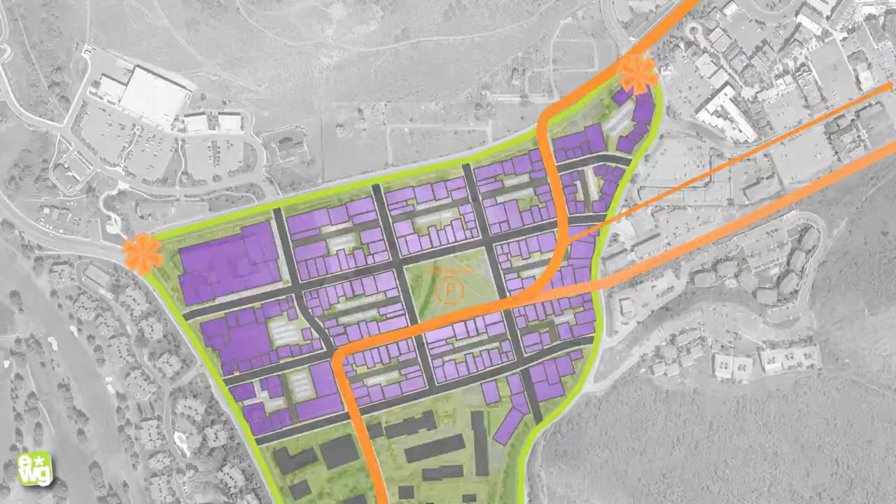The planning staff at the city has been working on this process for a long time too. Not too long ago they developed a plan. It's a study, not an implementation — it's what can we do, what's possible in the Bonanza Park District. And they came up with a concept that was sort of form-based code: traditional street grids, similar in scale to what we have in Old Town, something that's walkable, something you can use, where there's multiple activities going on that creates a lively place.

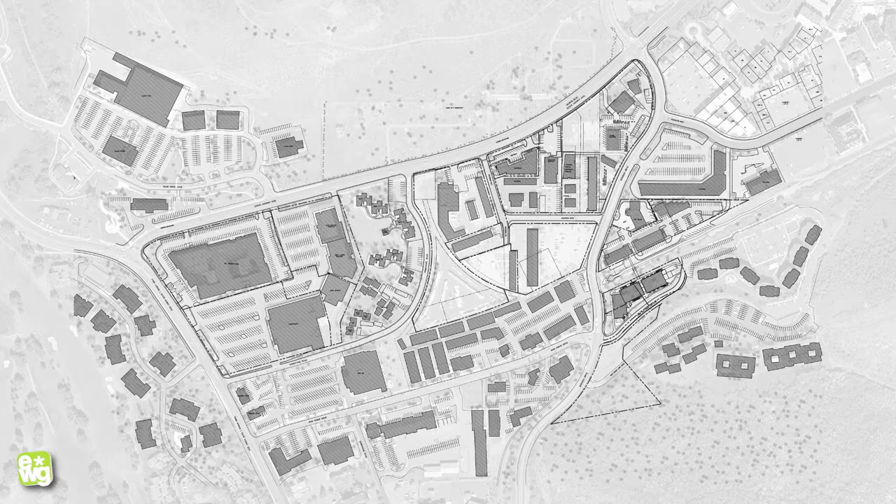Well, as a developer and an architect, we had to go back and look at how can we implement that idea, what are the opportunities here. So we went back and said, here's the existing conditions, here's what's there, here's the property lines, here's the buildings that are there. How can we implement the idea the planning staff has put together and turn it into something that's possible?

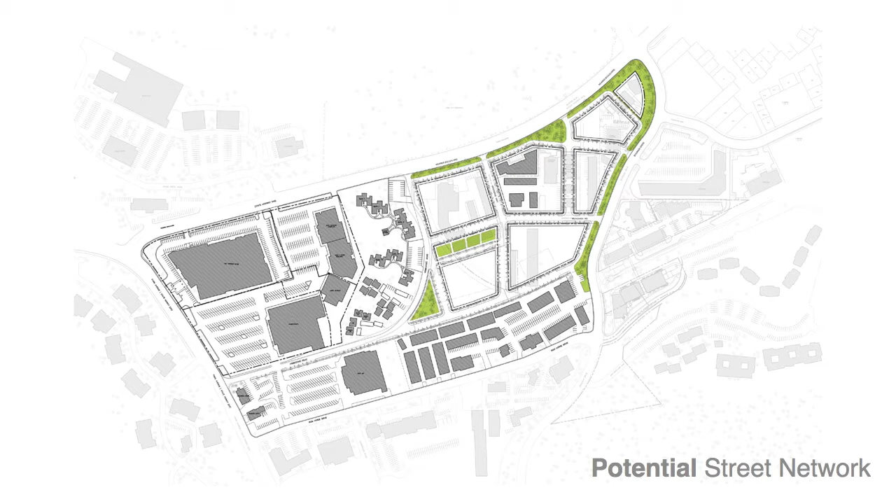So we developed a potential street network. We used that basic idea, tried to work with most of the property lines. We got some help we're going to need with Rocky Mountain Power, the city. But this is one idea of how we can develop it.

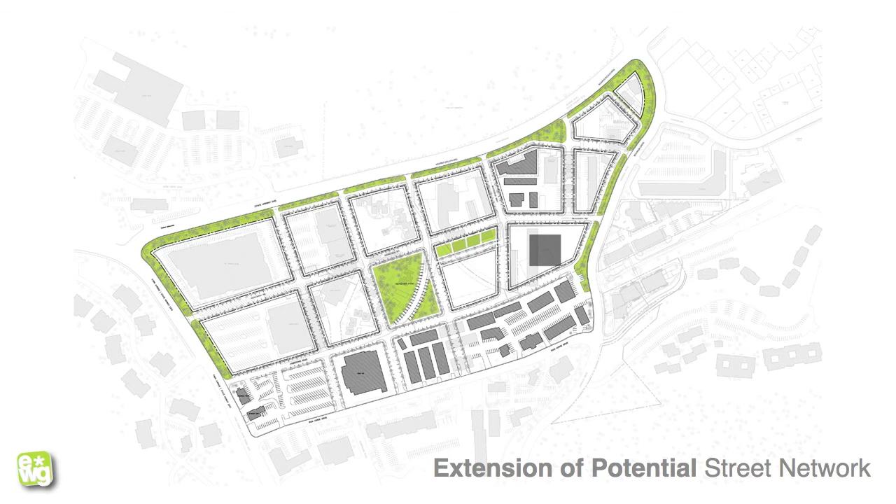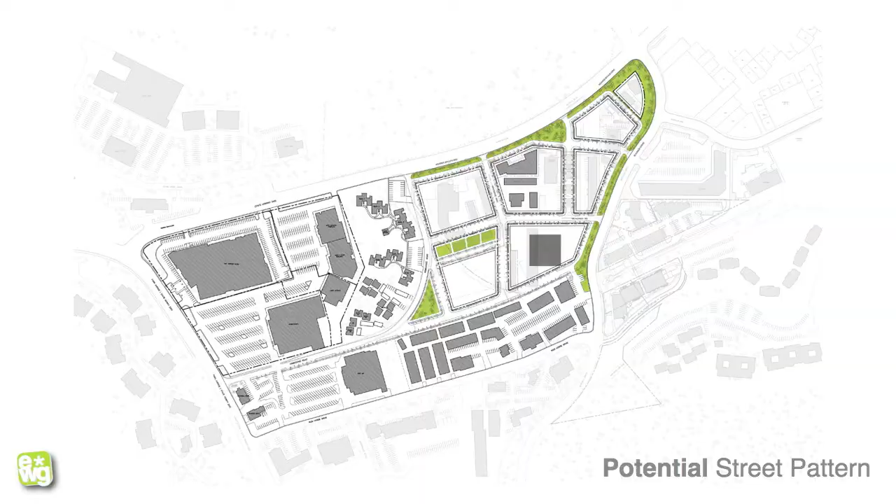Start to see central core spaces — these are the areas that we're working on. How could you extend it? That's a possibility, similar to the ideas developed in the document by the planning staff. But we're really talking about the street pattern and the areas that we've got this existing MPD — it's where we can make a difference as a developer and an architect.

So if you understand what's going on, you want to understand how do you solve the problems that are there — what are the real problems? Well, today we have these roads that go around the perimeter. They really are arterial roads, and arterial roads move people to and from different places.

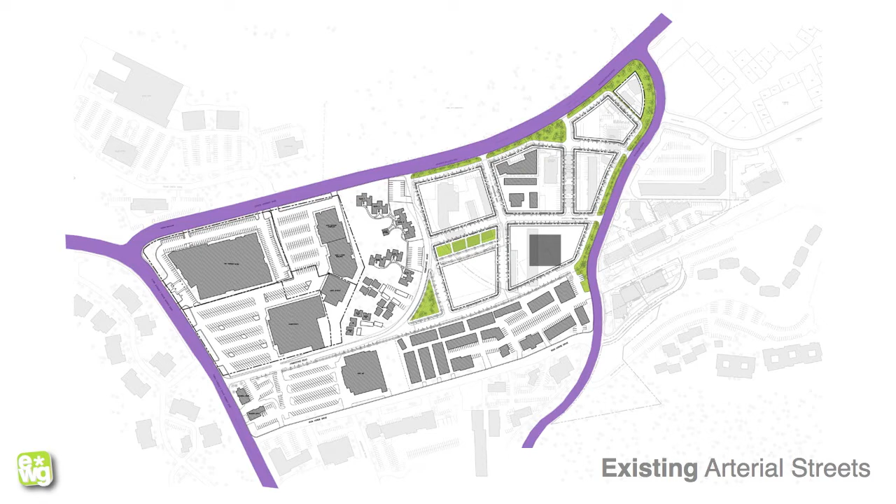They're interesting, but they failed somewhat because the arterials are also trying to function as a commercial street. So they're working for two things, and if you try to do two things, you're probably not doing either one very well. So we've looked at what can we do to solve that problem. We've looked at developing a potential mountain boulevard, reducing those turn-ins, the turning actions, the curb cuts, all the different things that cause traffic patterns and log jams in town.

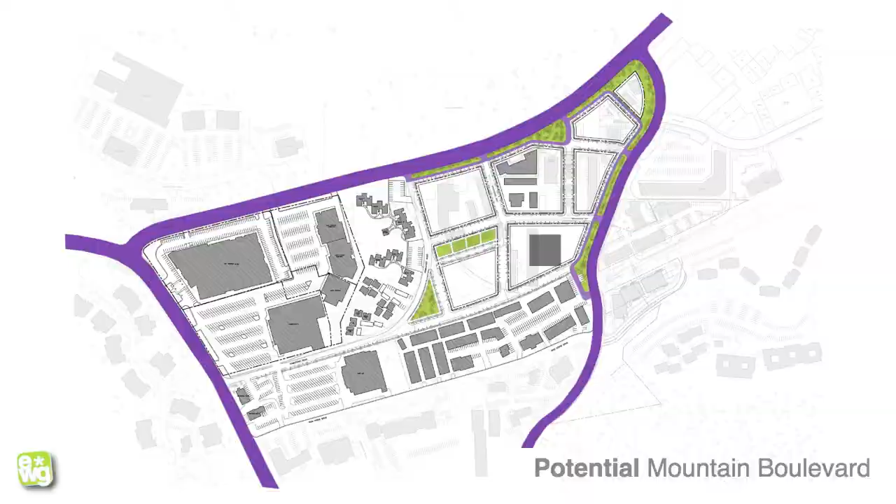And if you look at that in this situation, those little purple lines you see here become access points to the properties there. What's a potential mountain boulevard look like? This might be a section of it. And why is this important?

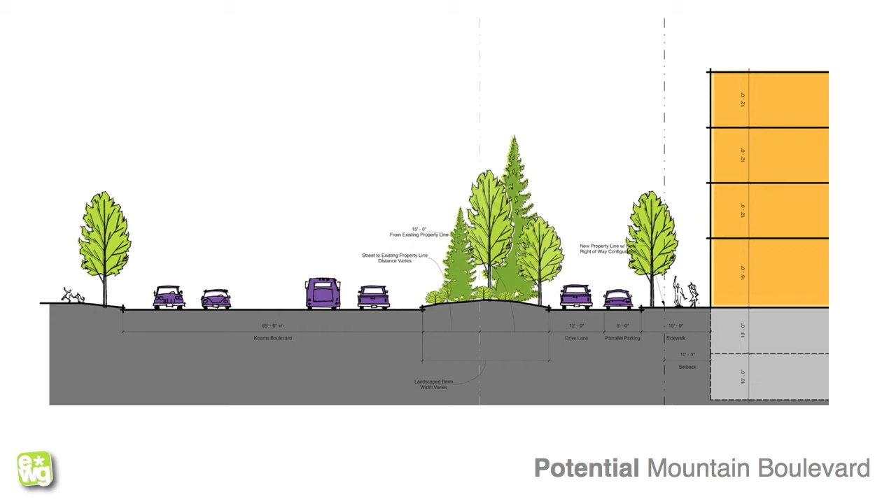And then we developed this landscape buffer, a relatively large space where we can plant mountain-type plants. It creates a place to store snow — one of the things that's really important, I think, here in this climate anyway, is a place to make it work. Then we have our access, and then sidewalk or areas before you hit a building structure.

We already have an idea in town that's very similar to that. This planting area that we've talked about, the one I've shown, goes from here to about the creek bed, and the buildings start back here at about the road. So you get an idea of what the aesthetic of that might be, the opportunities that we have, and what it might be like.

Once you start looking inside, you're saying, well, if the arterials are your commercial streets, where are they? Well, they're in the core. We're trying to create something interesting and lively. And if you put those in the core, the orange lines here represent what our primary commercial streets are.

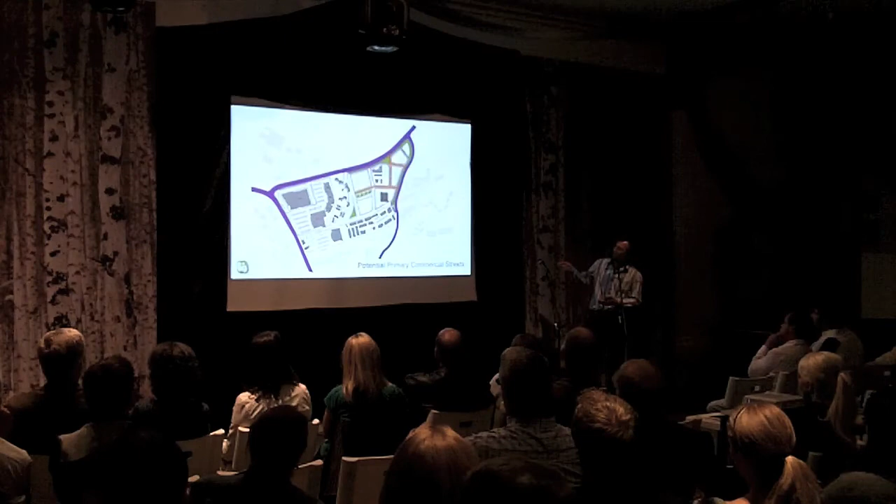We've drawn a section through this piece right here, and we've called that out as sort of a market street. What's a market street? Well, you see these all over Europe, on the East Coast, in other older towns and cities where there's a central core. They're an activity where there's both transportation happening and activities and places for community and people to interact.

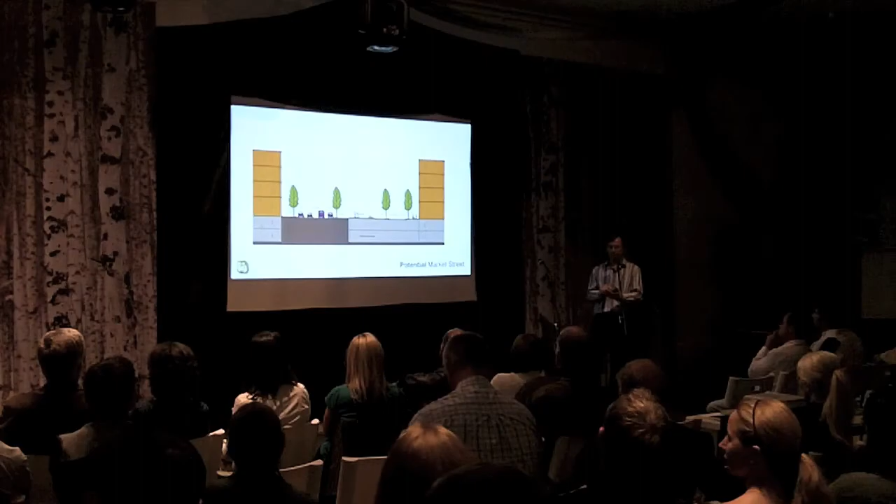What's it look like? It might look something like that. Maybe there's more sidewalks here. Maybe there's mass transit in the center of this. There's an opportunity to create something really unique. But this is about the same scale and size of what we've shown.

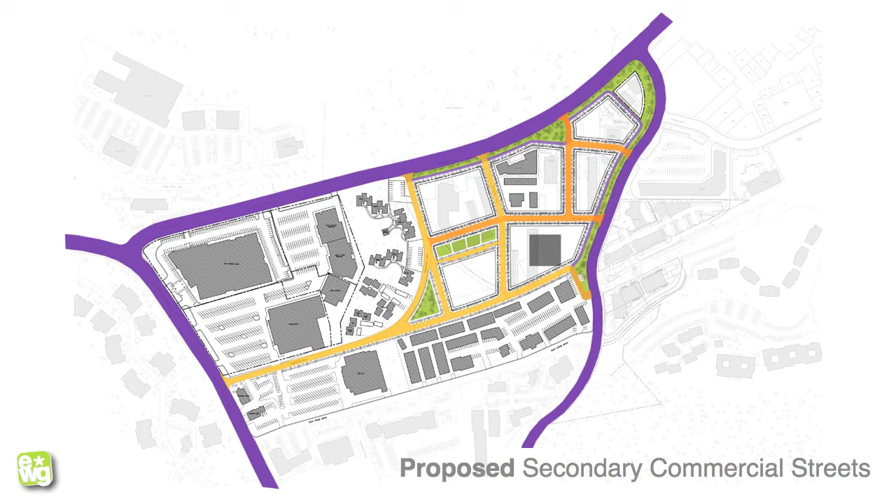And then you get into secondary commercial streets, and what do those look like? Those are the lighter orange that we've shown here. So you start to develop more than just one street. You start developing activities where people can find places and get together and do different things. A section of that might look like this.

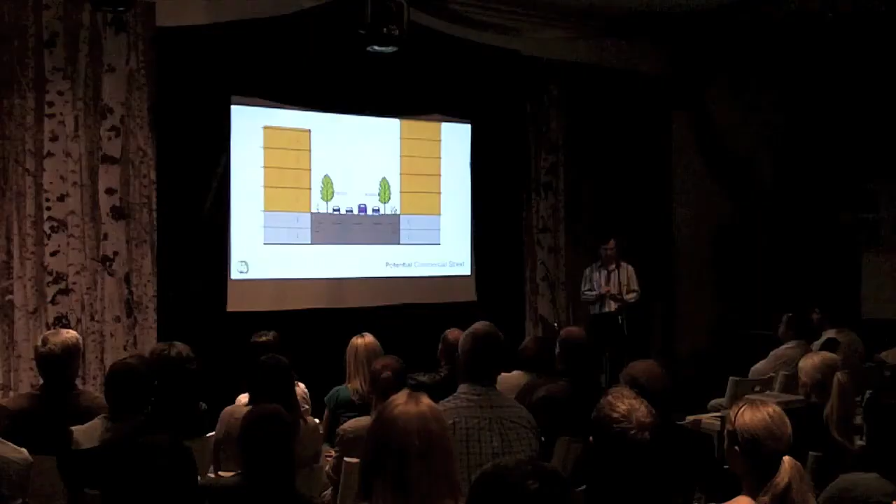Well, this is pretty close to the same dimension that we have on Main Street. Looks about like that. If you want to look at those heights, you want to look at those spaces, they're very, very similar to what's on the lower part of the old part of Main Street.

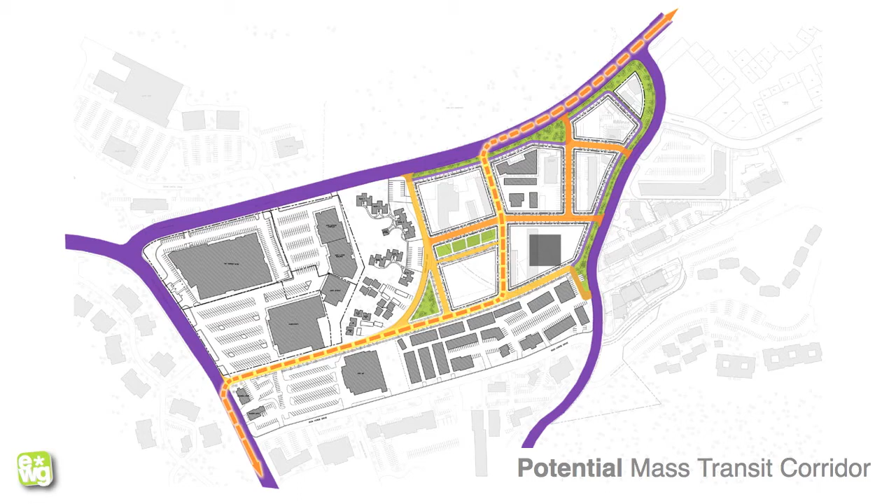Mass transit. We talked about that in the initial concepts that were developed by planning. Mark's looked at this before, we've done other studies, but we want to make sure we preserve corridors for mass transportation, whether that's rapid transit bus systems, light rail, some sort of streetcar, something in the future. We may have 60,000 people here in the wintertime, just in the city limits from time to time. You never know exactly what we're pushing and how many people.

We want to make sure we don't design our way into a place where we can't do that. It also leaves us the opportunity to connect this kind of commercial space to Old Town, connect it to out of town. I think that's a critical part, is that this becomes another node, another neighborhood in the city.

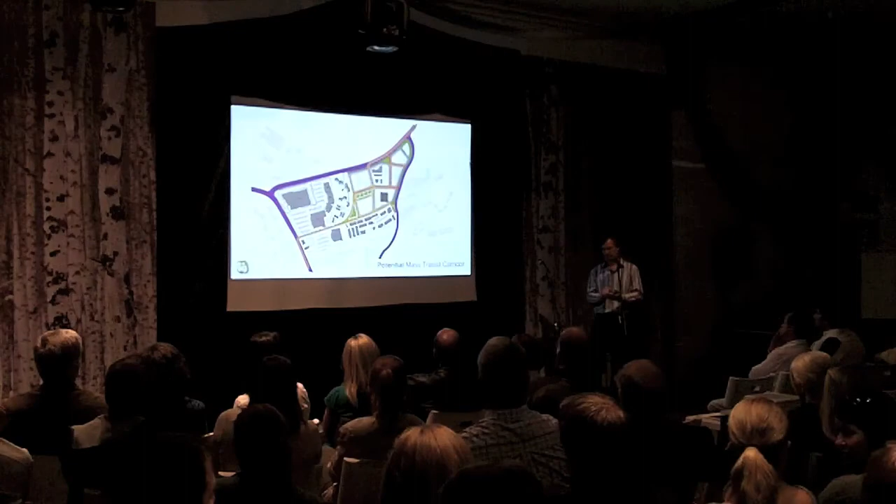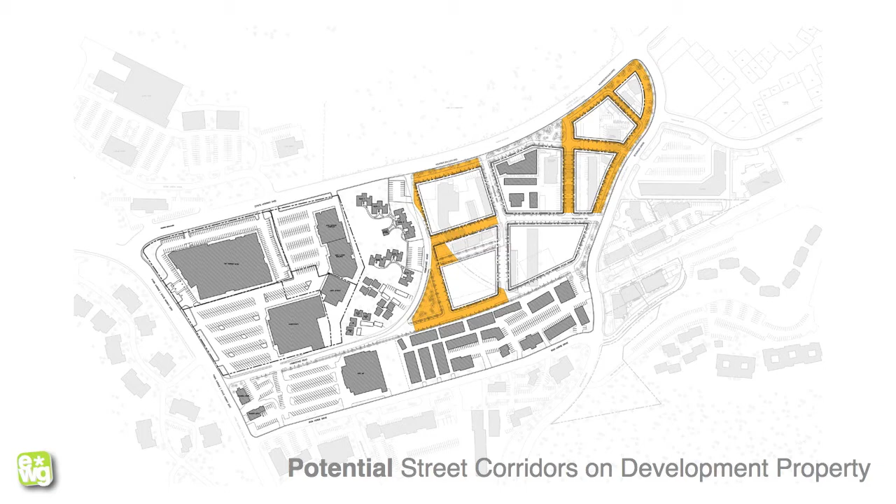So what does that do? Well, if you're a developer, you're going to be giving up space. You're going to be creating space for activity, for access, for community. And that's what the orange represents. Those are areas that we'd be dedicating in the private land.

So that's just a potential street network. And we're just talking about transportation and creating different kinds of community space. What does that do? How do you do that? Well, in our world as architects, we have to go through a process, and that process is many-fold.

And so the first thing we do here is we do a massing study. What is the existing underlying code? This is one version of it. We've done separate different versions of how it can be interpreted. But basically what our existing code says, you have certain setbacks and a certain height, roughly 3 to 4 stories, depending on where you're at and how you design it. And that's what we get.

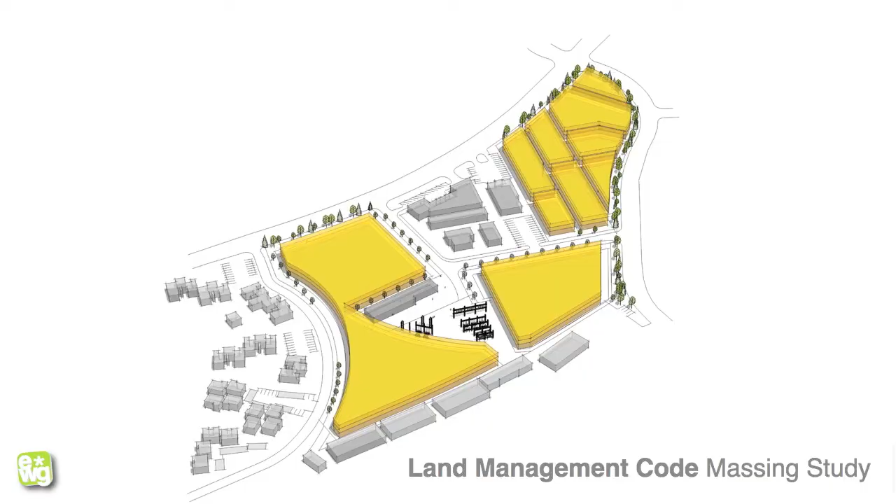It doesn't really address the properties and the opportunities. So we took the existing density that was associated from that 3-story structure that was sort of like a pancake, and we put them back into the street network that we are proposing.

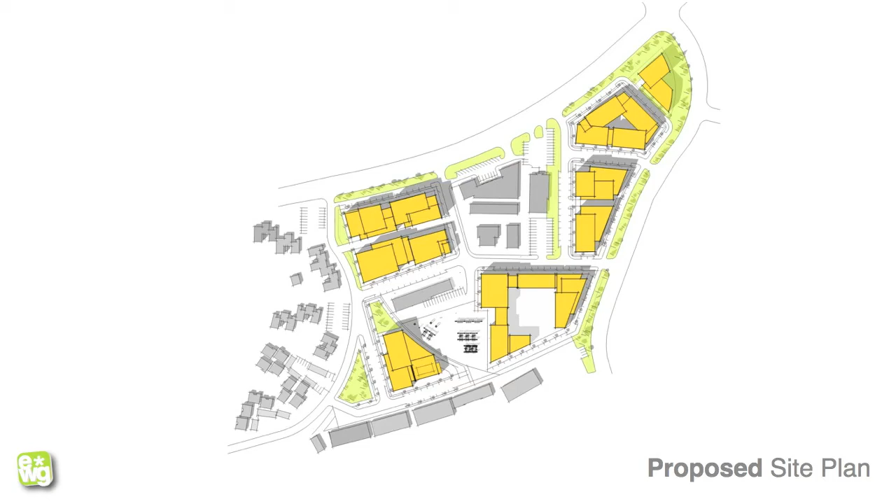How's that look? Well, when you do that, you're going to take some of that space and put it up on top of the space we just took. Mark referred to it as holding a piece of paper. If you've got something out here like this, and it covers this much space and you fold it over, it's taller, but it's covering less space. So that's the principle behind why we might be looking at additional heights.

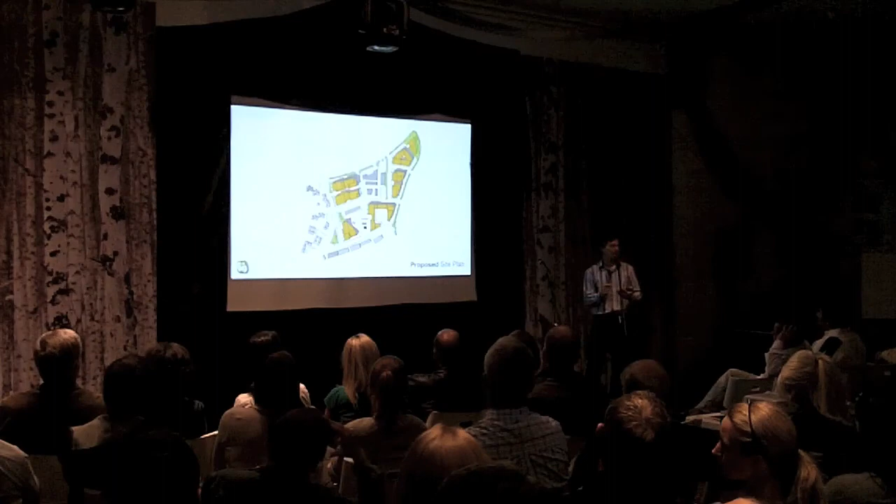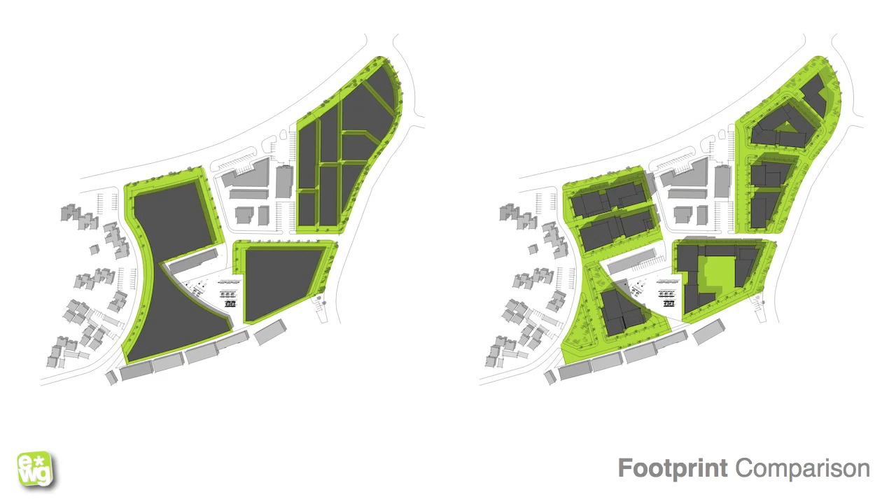Another principle in it gives you an idea. Now, these are shown as green. All that space is in green space, that's space that's not being built on. So the footprints are the brown or the black, gray areas. This is what the underlying code, one of the versions, is. This is how it worked within the proposed street network. So you get an understanding of what the difference is.